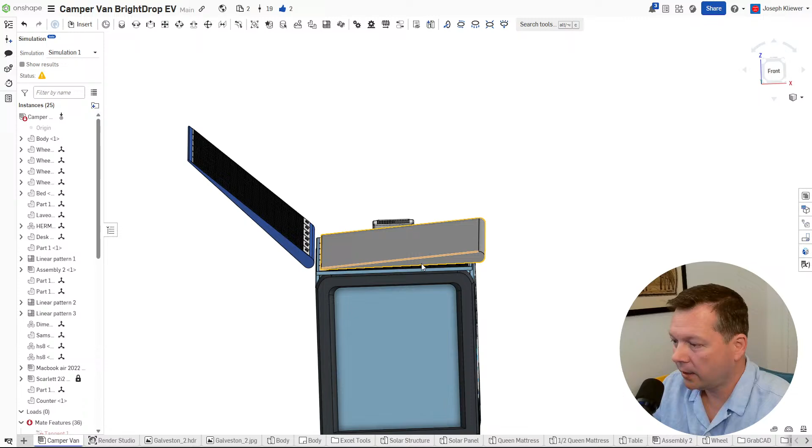And when you get to the site, push a button, you got an app, they open up. They automatically track to the sun, or maybe you just have a static setup, maybe you just got two shades on either side like that. So there'll have to be some pretty hefty actuators in there to support all that weight.

We can go into perspective view, we can fly in. This is what it'll kind of look like inside. And this is completely open to be reinterpreted however we want.

Initially, the thought is to have a queen-size bed that drops down, and then during the day it slides up. The monitor/TV could slide up, bed comes down, you can watch TV. More bed goes up, TV comes down, you've got a big monitor. You've got a seat here, which would turn into a couch with another cushion and double up as a bunk bed.

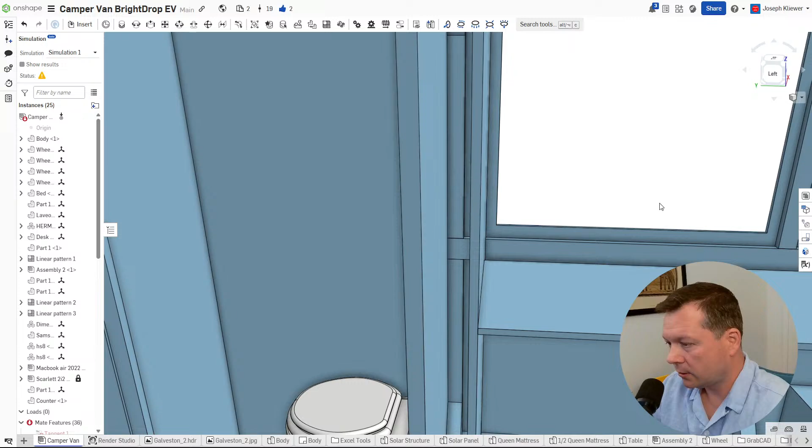And then you've got a toilet over here. Thought is maybe all the plumbing could kind of go in here between the walls. And this would be the kitchen area, so have some kind of fridge underneath, induction cooktop, everything you need up top.

Let's see. Oh, so the specs on this thing. Thought maybe we should kind of dive into what this Bright Drop EV van looks like, so I think we'll go.

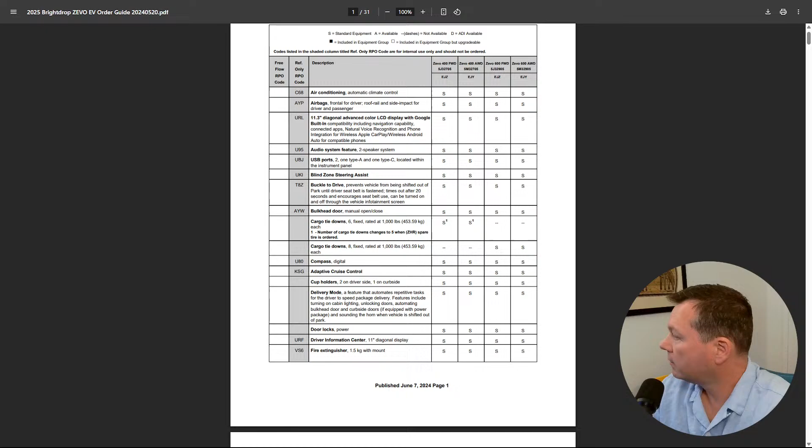Pull this off. Oh, I got it in the browser here too, I'll just use that one. Close that. So we start by adding some of the stuff into Excel here. Download Excel, and this is in the Onshape file. We'll launch that. Enable editing.

All right, so we can add a tab. BrightDrop specs. And get back to the model here.

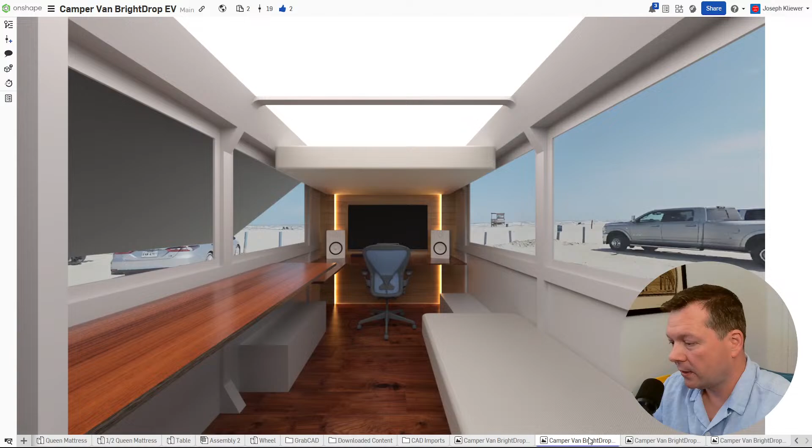And this is free to use software, so anyone can get in. It's all open. The only thing that's not is you can't do renders with the free version. I did render out a few that you can see, but you can't create them without the paid version. So actually this one, you can see the Cannonball Run car there in the background. I took a 360 photosphere when we were in Galveston, so that's kind of cool.

Which I think is a really good use case for this. You can park out on the beach, go out, do whatever you want, and then when you're done, you come inside, you've got AC, shade from all the elements, and the wind and everything.

So we're gonna put some of those specs in here. Oh, I forgot to mention, but this thing is on a crazy sale right now. I've got some of the incentives going on. So MSRP for maybe the max version with everything is I think 80 to 90,000, but they've got 25,000 off. Then they've got another 3,000 off for Costco exec member, another 2,500 consumer cash. Then if you're an LLC, you take another $7,500 off for the EV tax credit, and the thing's over 6,000 pounds, so if you have an LLC you could write the whole thing off on your taxes. So that could be pretty cool.

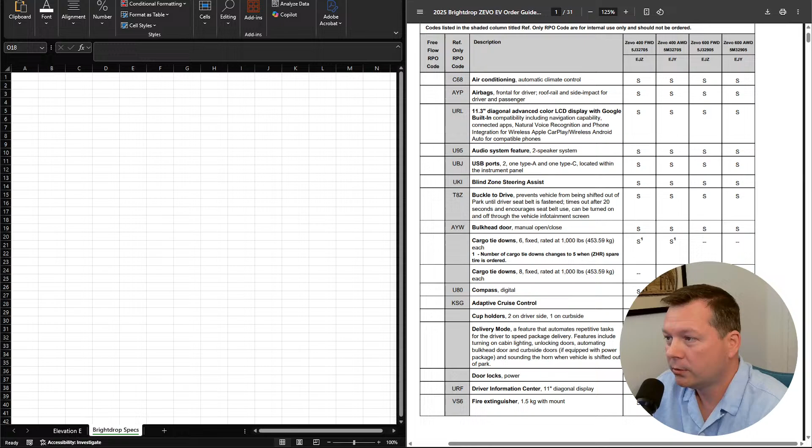The problem I see with the way you're folding the solar panels is that you can't charge while driving. True, the thought there is it's flexible, so you could fold it up. There's different options, like maybe you just delete these two, you just have them on the roof and you're charging all the time. But while you're driving, I tried to position them so they could come down flush along the side, like this.

Now I'm not sure what that does to aero. Looks a little goofy, but that way you could drive. I'm still kind of concerned about the shading you get from this kind of overhang. But in this scenario, the thought is you could drive and you get enough room where you can still get in and out of the door. So that should be an option too. And the actuator should be beefy enough, and maybe there's a latch at the bottom that you can latch them in.

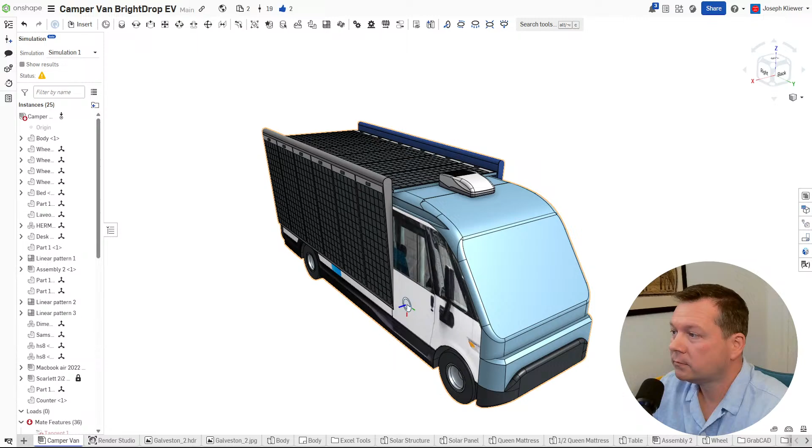So where were we? Oh, back to Excel. So these are all standard options, we'll fly through those. Standard.

But the interesting thing is some of the stuff you get in this document, which I think is kind of the ordering guide for dealers, gives you a little insight into the design and what this capabilities are. One of them's cool, Wi-Fi hotspot. That's kind of neat, so you wouldn't have to have a separate Wi-Fi hotspot, you could just use the OnStar hotspot.

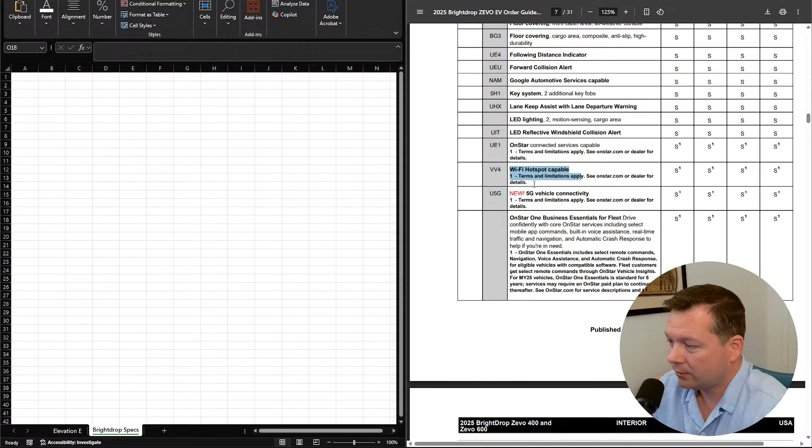Although in our old truck that had Wi-Fi, it had to be in accessory mode to work. So if the vehicle powers down, you might lose that, and that could be tricky because you don't want to leave the whole vehicle and the high voltage system on just to run a hotspot. That would drain a lot of energy. Let's see.

Flying through, you've got a ton of options here, mostly standard, like the tire inflation kit. We do have the wheels, so that's actually something we want to capture because I'm curious what the diameter of the tires are.

So we'll paste that in. And the wheels, we have two options here. They're all 17-inch, so I think that's just the style, black or white painted. But they are 17-inch, so that's kind of important.

Let's see, battery. So you've got two batteries. One that gets up to 166 mile range and one that's 272. I'm not sure if it mentions it here, but one is a 14-pack Ultium and one is a 20-pack, and the Hummer has a 24-pack.

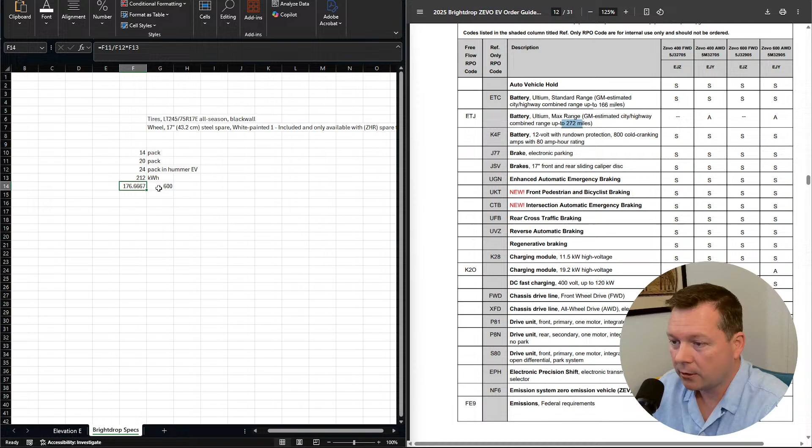In the Hummer EV, I think that's 212 kilowatt hours. So if we're looking at what this one's going to be, the 600 would be equal to the ratio of this divided by that, times the Hummer kilowatt hour. So we're looking at a 177 kilowatt hour battery pack, which is going to be important when we're charging it, just how large it is. For reference, the Tesla has, I think, a 75 or 80 kilowatt hour, I forget, so it's pretty much double what the Tesla is.

Charging - so this thing doesn't have a real fast charging. I think it's only 120 kilowatt DC, compared to other vehicles that can peak around 250.

Oh, this is the good stuff right here. So the drive axles, you get a few different options. You get front wheel drive or you get all wheel drive. The front wheel drive is new, but they mentioned the actual drive unit. So this is an X81F for the front drive only, and then the all-wheel drive is an X80F and an X77R.

And I used to work at GM, so I kind of know what these mean. I'm not totally certain on the 81F and the 80. I think the difference is one has a park system in it and one doesn't. So if you have a two-motor system, only one of them needs to have the park pawl, which engages and is for parking. If you have just the front-wheel drive one, I think that one's got park, and then maybe on this one it does not have park, but it's the same unit. And then the rear unit has the park system. But these are from the Hummer.

So for reference, these motors are 250 kilowatt capable, which is 330 horsepower. So in theory, the dual motor could go 660 horsepower, but they've limited it. So they're kind of derating it, which makes sense for a big, heavy vehicle. The duty cycle is a lot worse. They've also changed the final drive ratio, so you've got a lot more reduction up front.

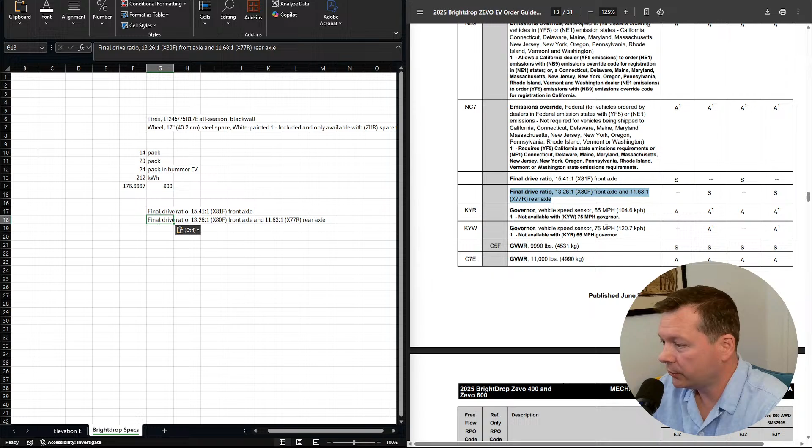And this is the full all-wheel drive. Another thing - in order to get that big battery pack, you have to get the all-wheel drive, which is good. If you're going to be out camping, getting around, you don't want just front-wheel drive, especially with a vehicle that's going to be at 10,000 pounds.

Oh, here we go, here is the rated horsepower. So front-wheel drive, 240 horsepower, 180 kilowatt. Now we know that motor is a 250, but they've derated it. And the all-wheel drive, interestingly, they're only rating it at 225. So they've significantly derated this motor, which is great for longevity - it's going to last a long time.

You know, people sometimes complain about how come you can make a semi-truck go a million miles and a car only goes 150,000. Well, they have these huge, massive diesel engines that are designed to last that long, and they're much heavier and much more expensive. So the other way to do it is you just take something that's rated at 250 and you derate it, and now your duty cycle is much less and the longevity will be much better.

So let's paste that in there too. Just grab it. I'll have to clean this up later.

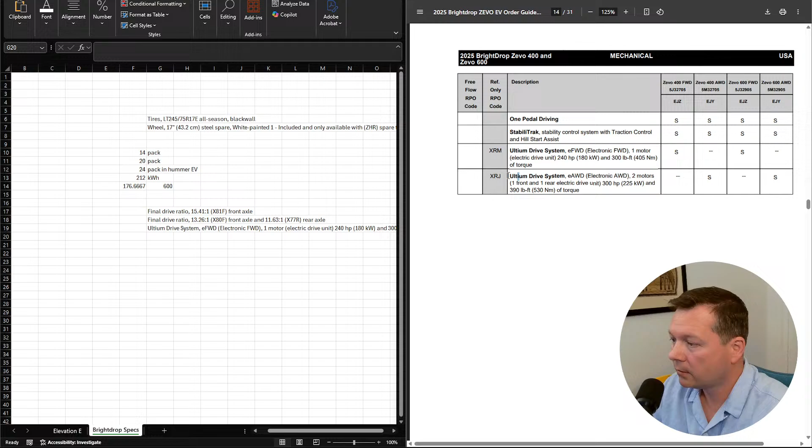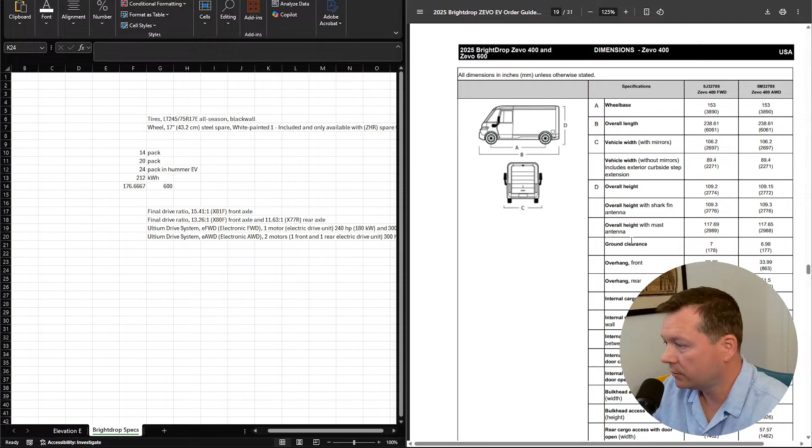All right, let's see what else we got. Yeah, different OnStar options. Oh, the dimensions - actually, we can check some of the dimensions. We'll come back to that, make sure I modeled the interior correctly.

Curb weight information - so each RPO or option is going to adjust and modify the curb weight. Here's your wheel options, here's the RPO - these are the options codes that they can put in there. That might be it.

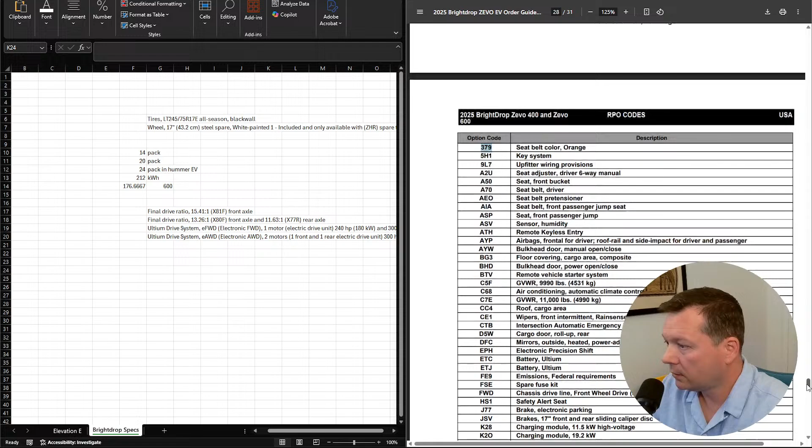All right, let's jump back into the model then. Let's get back to some of these dimensions here. So this is the 600, 600, 400. Okay, so we want the 600.

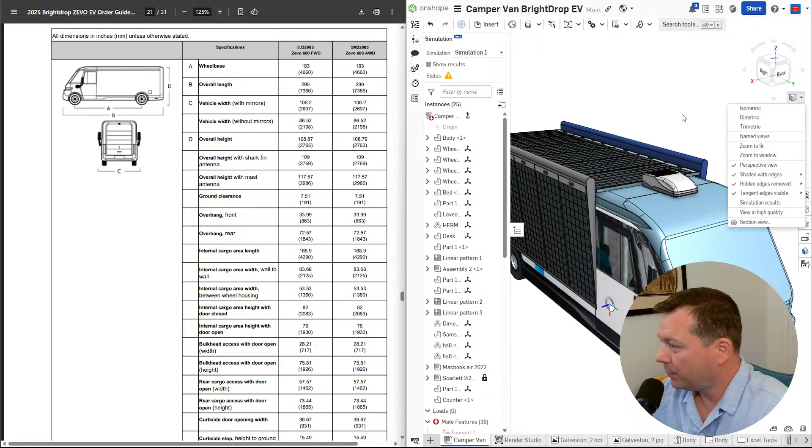Section view. I just started using Onshape, so I'm new to it and a bit rusty, bear with me. Where is the section view? Oh, right there at the bottom. Section plane, I'll just pick the top here and we'll chop the top of this thing off so we can look inside. Check that.

What I did was kind of cartoonishly model the exterior. Eventually the idea is to scan in a good exterior model and put that in there so it looks proper, and then all the internal stuff will be measured and dimensioned. The internals, where the supports are and everything, should be reasonably accurate. I got access to one and a tape measure and went to town measuring where everything was.

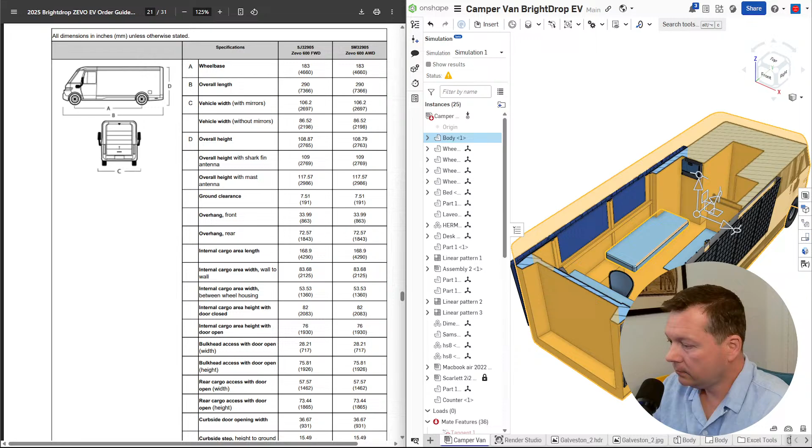Let's see, wheelbase. I think we just want to open this. Wait, give me a minute here.

Let's see, assuming you can figure out solar panel placement to generate power while driving, how are you going to get around the lockout, which likely exists for safety, that prevents charging while driving?

Good question. I don't think it'll charge the main battery while driving. There's a bunch of options we'll have to go through in terms of the solar setup. Ideally, you would direct DC charge and tie in directly to the batteries with an MPPT controller, and you could go right up to 400 volt. That would bypass some of the safety features and probably wouldn't be doable. The other option is you have a large auxiliary battery inside.

So if we go back here, I'm thinking this corner would be the power electronics side. You'd have your inverter, your charge controllers, and then some large batteries stacked in here. That would then have to charge through the AC charger on the vehicle, which is less than ideal, but if we have to do it, it's better than nothing.

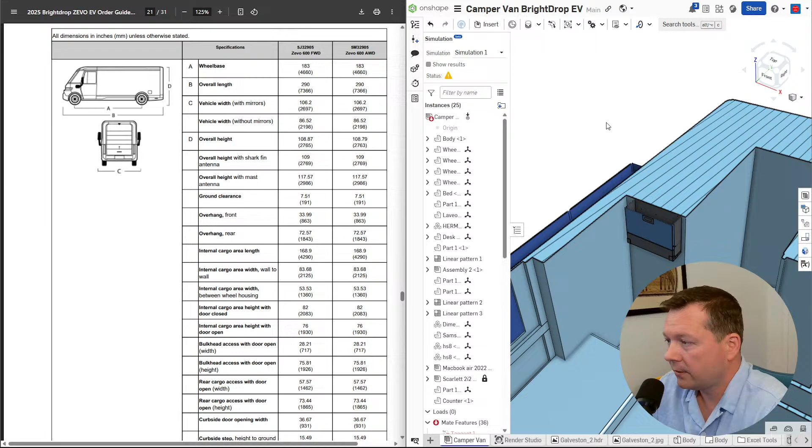So while you're driving, it would be charging this auxiliary battery. In my Tesla, I had a 5 kilowatt hour one. In this one, you'd probably want to double, triple, or maybe 5 times that, so you could get like a 25 kilowatt hour battery, which would be big enough to extract a full day's worth of sun into that battery. That would be the plan there.

Once you stop, you could plug that charger in and dump it in real quick at like a level 2 rate charging, maybe 11 kilowatts. So that would be how you'd extract solar energy while driving, but you couldn't direct charge while driving, unless you tied into the system, which I don't think GM would let you do. You could always hack into it, but I wouldn't want to do that, you want to keep the warranty.

Okay, so back to the body, and we'll section it again. We'll just drag off the top here. So wheelbase, let's see, that should kind of match this sketch here. It's been so long since I did this.

So, 4,826... 190 inches. Oh, that's another thing, I've got Onshape set to metric, but you can type in anything you want and just type in the units and it'll take care of it in the background, so you don't have to worry about it. So wheelbase 183, huh? I thought I pulled that off of documentation, but that does not match, so we've got to change that.

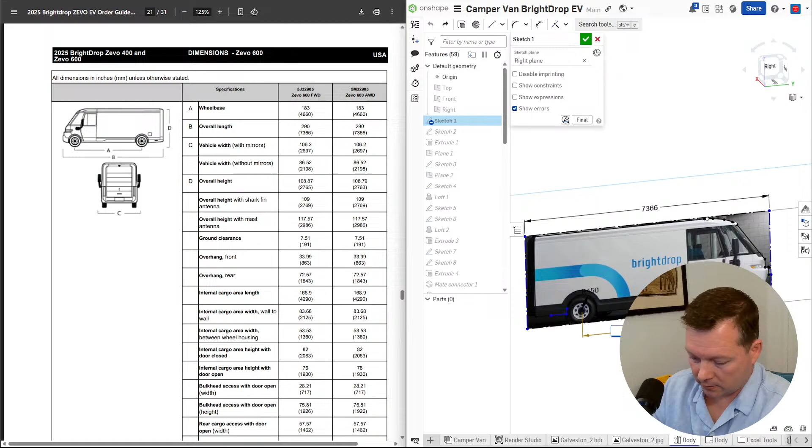183, now I'm wondering where I got 190. I don't know, if I change it right now it might break something. Let's just see what happens. Oh yeah, oh. Control Z, gotta type inches. 183 inches, okay, I shrunk that in.

That might explain it, because I was having issues with these wheel hubs. Now it cuts into the wheel hub, so that doesn't line up. I don't know, I will undo that. We'll have to look into that later. So that's off, that's one thing.

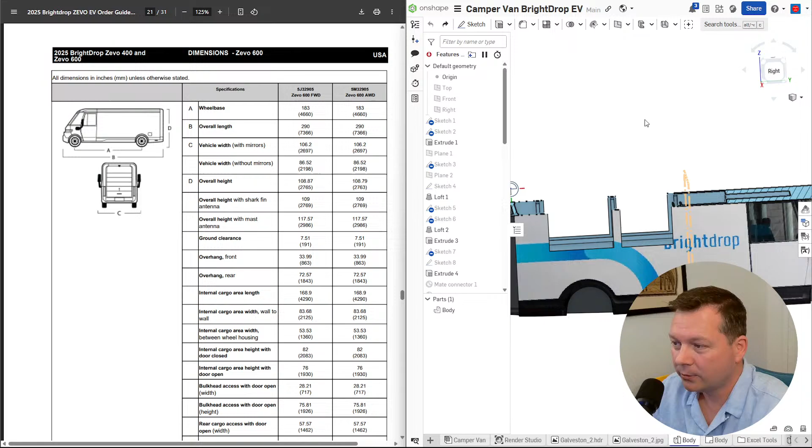Overall length, 290. Let's just show this sketch. That's not the right one. Sketch 3, hide that, 4, 5. Where's all that information in? I guess it's all here. There, I need to kind of hide that body so we can see the sketch better.

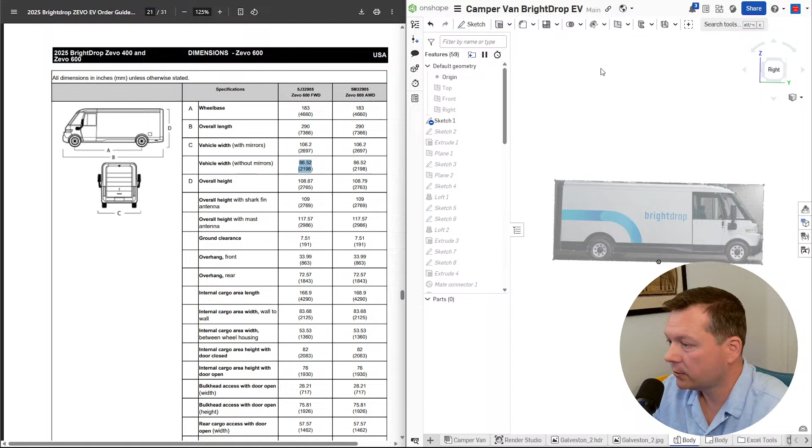Or we'll just go edit. So overall length, what did I put? 290, okay, so overall length matches. Vehicle width without mirrors, I don't think I had that number when I first did this, so that'll be interesting. Let's take a look at that sketch.

So this is a picture I found, and then I just pasted it in there to kind of get an outline.

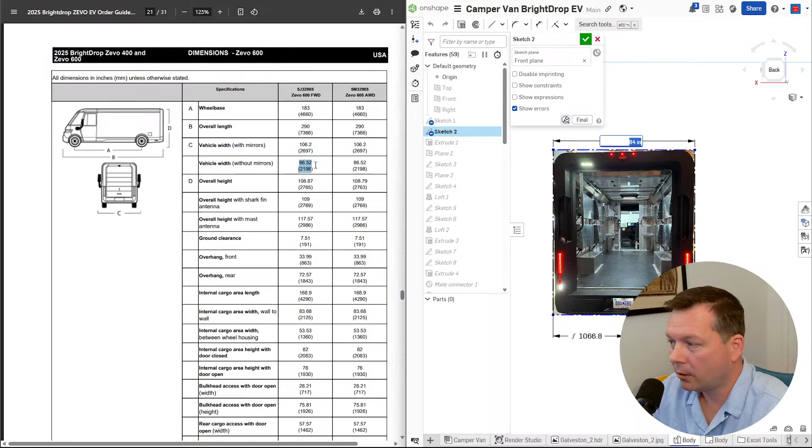84. No, okay, cool. We've got an extra bit of width there. So that's good. It's good to be wrong on the small side. We can fix that later.

Overall height, now let's check that. Edit. I don't have overall height in this one. Oh, you know what I did? I didn't have those numbers, so, well, that's overall height, and this is height of the box.

But what I did is I used one dimension to scale everything. So I used the picture as a reference to the height to width ratio, and then I locked that in with a number I got somewhere, which doesn't match, so I can update these. Turn that off.

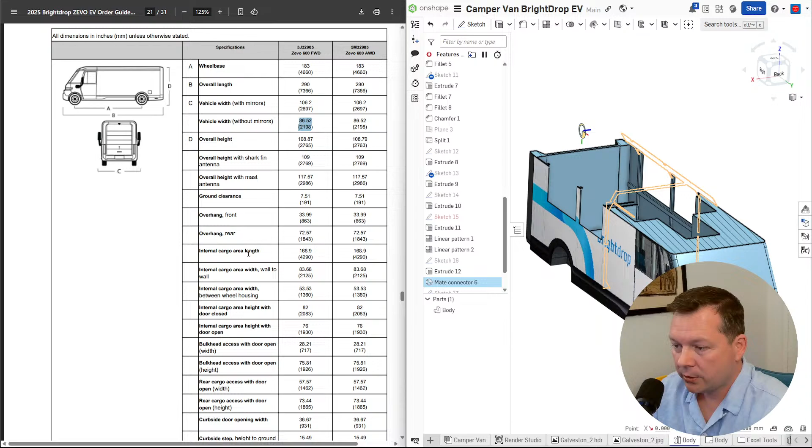Ground clearance, okay, that'll help with the underbody. Overhang, internal cargo area length, 168.9. Let's see.

Extrude, there's the sketch, so let's edit that sketch and let's see. Internal length here, 163. Oh, I got it short. We got some extra room. Nice, so it's a little bit longer than I anticipated, which is going to be good.

Internal cargo area width, wall to wall, 83.68. Okay.

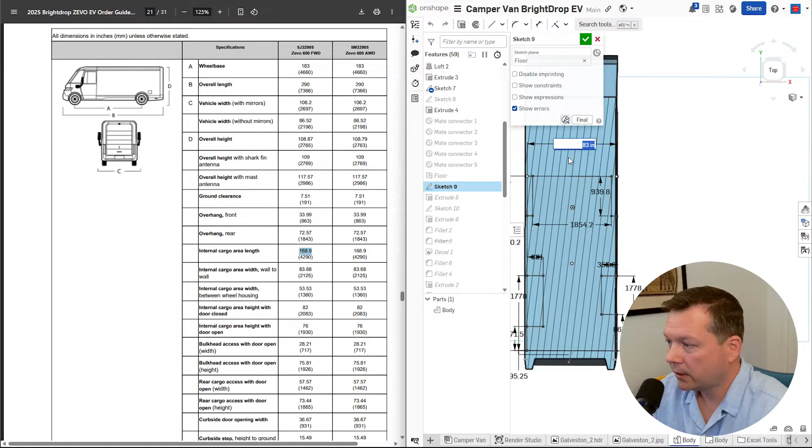All right, so we got some extra length there. Door height, bulkhead, not too concerned with that, but it's good that we've got extra room because it started getting a little tight on me.

We've got this siding here, which is pretty thin, not structural at all, and it has these aluminum supports, which are welded and kind of give the whole frame structure. So the thought was cut out largest windows possible in between those supports, and then these are what we can fix things to.

And then you've got the wheel well constraints. This one is a little longer because this extra part back here is where the charging port is. So all the charging is there, and if we can tie into that and direct charge, that would be the location.

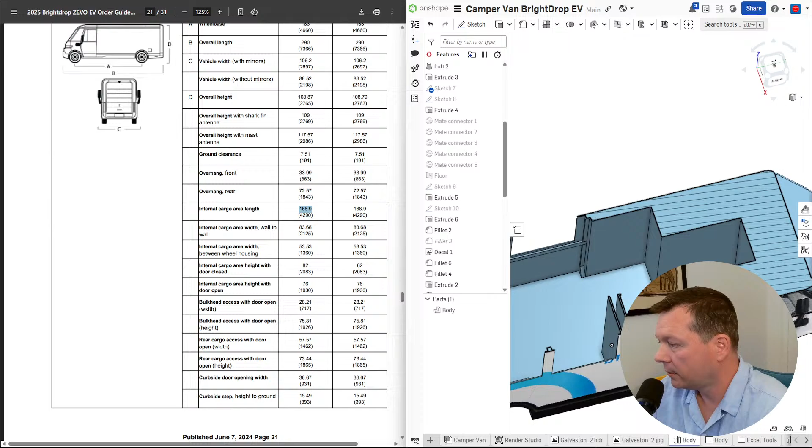And I don't have the cockpit area modeled yet. You can kind of see this is just a picture that I threw on top of the model to gauge where everything's at. So in here you've got the driver's seat, passenger seat. So quick layout here, we'll go back to the assembly.

This is the kitchen area, and it gets kind of thin. So this thickness here is about shoulder width, so you can comfortably walk through. So I don't want anything really protruding out into that area too much.

It makes the bathroom/shower a little tight, but the thought there is to have a tray, a water collection tray. Maybe it slides out, or maybe it's okay being that width, but then a curtain that extends out and gives more shape. Kind of like when you're at a hotel and they got that narrow bathtub and then they got that curved curtain that gives you a lot more room inside the shower.

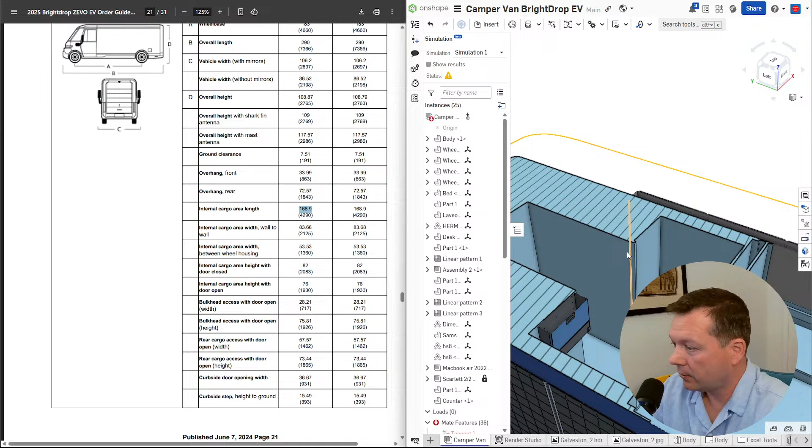Same thought here is to have something that extends out and brings a curtain out to give extra space, so you're not too cramped, and then when you're not using it, you don't have this large enclosed area that's impinging on the occupant space.

Oh, another nice feature about the panels folding down is it's kind of like a privacy mode. You can black it out, and I'd say stealth camping, but I think people are going to figure out that it's a camper van when it's got that much solar on it. It's got an air conditioning unit on top and all that stuff.

Which is another thing, Aero. So I'm not sure if we have anyone on that was looking at the Aero, but I think someone has access to some CFD software so they could do some Aero. And I think we can get the drag coefficients, the coast down coefficients.

They're published for passenger cars. I'm not sure if they'd be published for this. I'll have to take a look and see.

But if we can get those and then correlate it with a CFD model, so we take the base vehicle and we have the known drag coefficients, and then we correlate it with a model, get the same drag coefficients, then we can make all these changes and rerun the simulation and see what our new drag coefficient would be.

And then build a full vehicle model in Excel of power, battery capacity, all that, put in the drag coefficients, and we could plot out your new range at different speeds. So we could figure out exactly what our new highway and city miles rating is going to be.

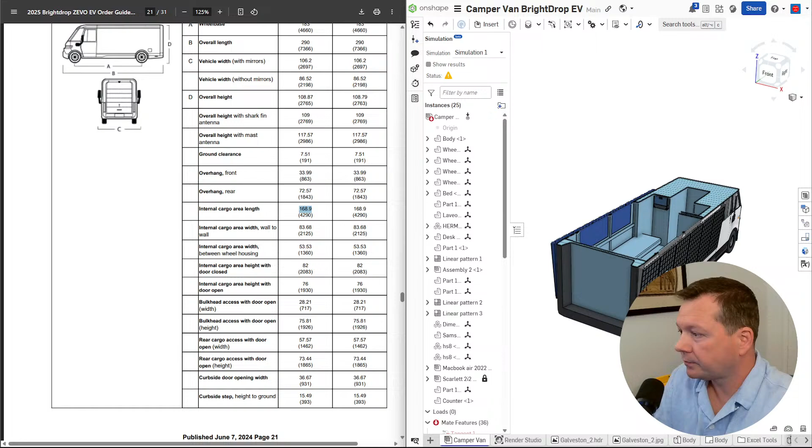Let's see what else. Let me chop that back off. We'll just turn that off. And fold these back up. Let me go full screen on this. I think we're done with that.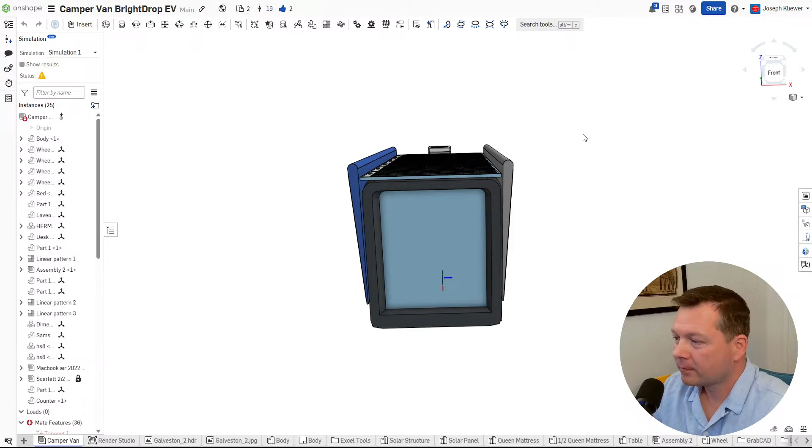Fold this back in here. Let's see, then we'll section it back, put the section view back on. Get those out of the way. And then I want to add another plane. We can chop the front off so we can see inside. Like that.

Ah, on my phone, okay. Nice, yeah, I'm not sure how this would look on a phone. This is my first live, so you have to bear with me here.

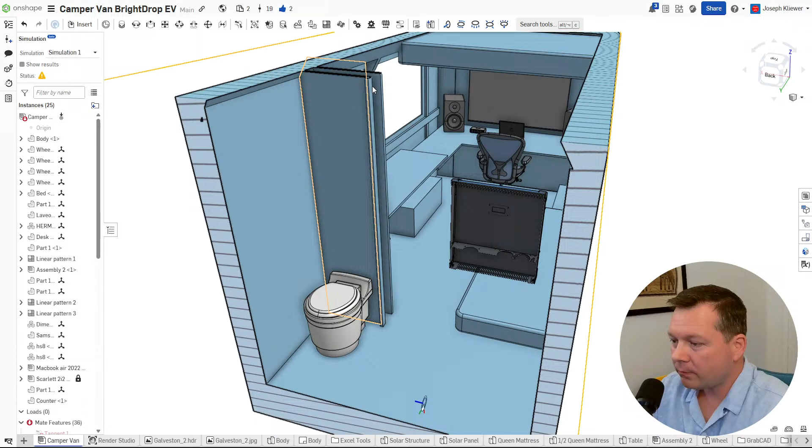And this is all just cartooned in. But here's the issue I've got. The roof, actually let me turn that, put the top back on so you can kind of see. The roof here has this angle, so I don't know if a full-length queen-size bed really fits, although we just found we actually have a little more width to work with than what I've got in here. But if it can only go up so high, then it doesn't give you a whole lot of room.

Also, the sliding door comes up into here. I think ideally you'd want to get rid of that sliding door, the garage door style, and have doors that open up out the back. And then you could get rid of the rails and all the internals here. In fact,

Let me pull up some pictures of this.

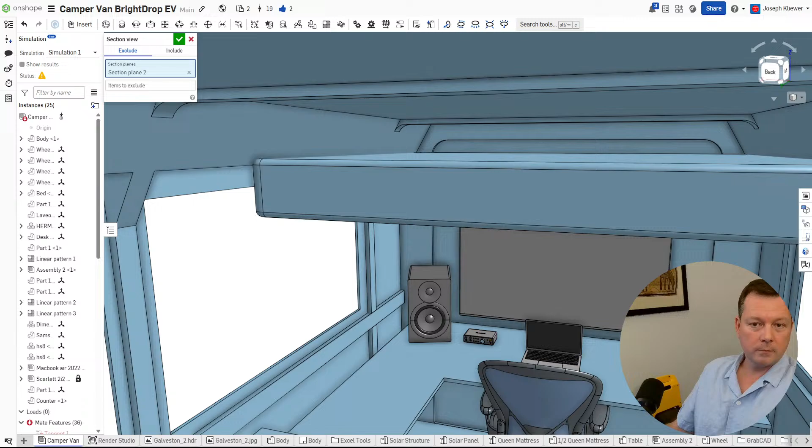The other problem is, let's say it's snowy and nasty outside, and you've got dirt, grime, wet on this garage door, and then you open it up, it's all going to drip into the inside of the van. So you have to enclose it all off and put some kind of drainage that contains it and seals it to the outside, not to the inside. That would be another reason to get rid of this door and these rails.

I don't know if I have any other good pictures. Most of them are just real close-up shots of taking measurements of everything that I tried to model in as accurate as possible.

We can get rid of that. So that's what we're working with here. And I don't know, maybe the bed rotates the other way, so instead of sleeping sideways, you'll sleep in line with the vehicle.

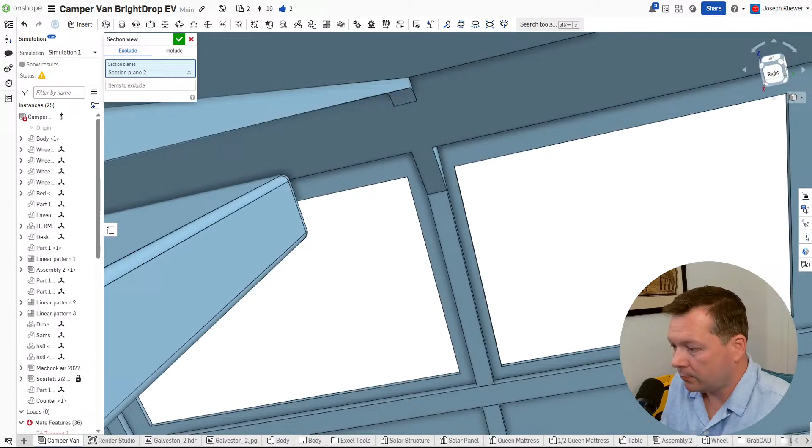But that presents a problem with the couch slash bunk bed setup here. If you get behind, actually it's floating in two planes here. Let me lock that down. Oh, I'm still in section. Accept that. We'll pick this surface. And gosh, how do I get in and pick the bottom? Pick that surface. And where is the mate?

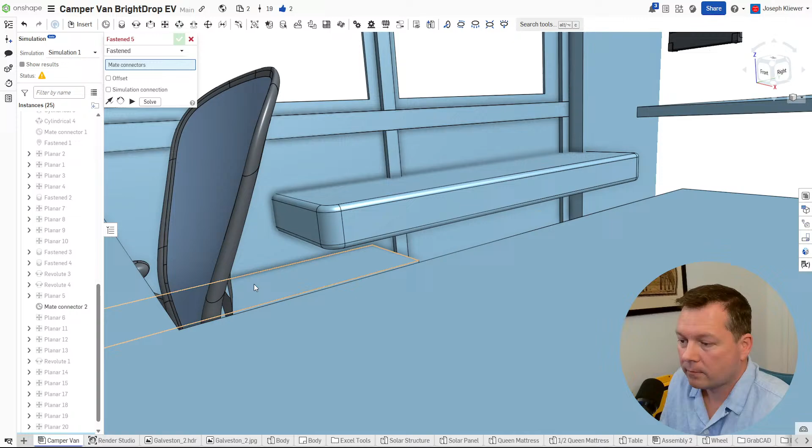Parallel mate, fastened mate. Okay, hopefully that'll still let it slide around. Let's see, no, I totally locked it. Okay, undo. Undo.

Actuator attachment for the solar panel wings will be tricky to get the motion you show if you have one fixed anchor point and one movable point. If you have one fixed anchor point and one movable, move the second end of the actuator, second point, and continue. Not sure exactly.

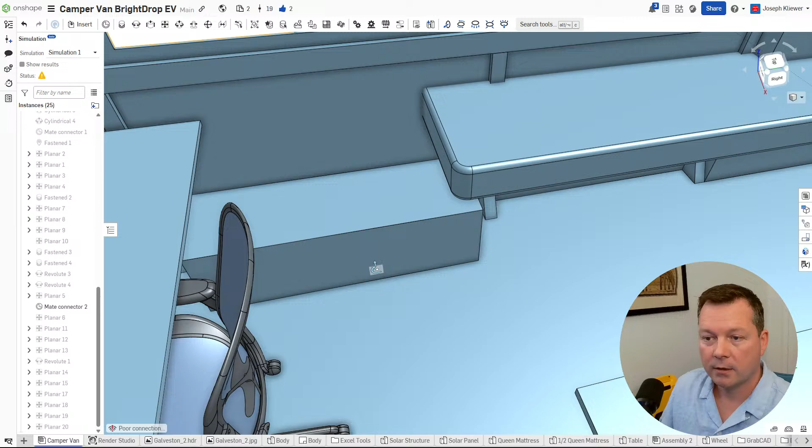I'm thinking of having a kind of like a torque tube. So this will be fabricated similar to an airplane wing, so it'll be sheet aluminum with struts inside. It'll be kind of like an airframe, and then there would be a torque tube that it's fixed to, a rigid long tube of aluminum. It would have a bearing support in one end and a bearing support in the other end, and then inside of that would be an actuator, a motor with a pretty large gear reduction to drive it. I think it needs to be around 1,000 to 1.

And I haven't looked yet, but some good points to reference might be actuators that do the blade pitch on wind turbines. Those have to be pretty powerful. Another one is Fanuc robot arms. They have built-in actuators that might have the right reduction in power, so maybe you could find something like that we could fit inside of there. I don't know if that answers the question.

Back to this thing. If you get a top-down view here, zoom in. Let me just chop the top of this off again. Edit section, add a section plane, which is any flat surface on the top.

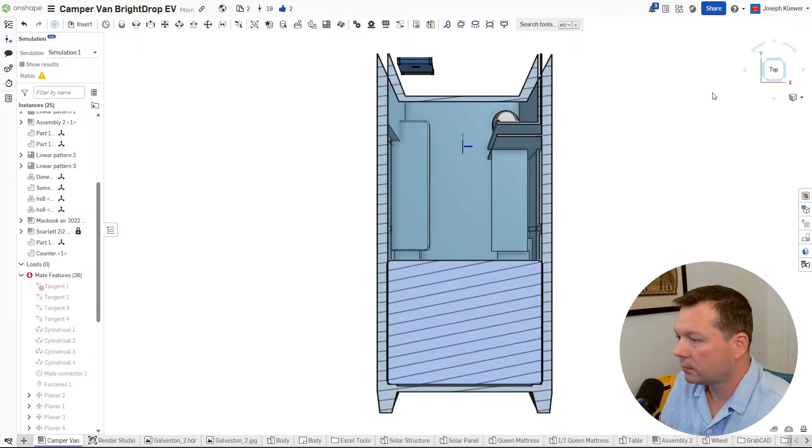So we put it back here to where it clears. This is a little cutout for the door, the sliding door that goes inside. If we do that, these two beds collide and you get some headroom issue. If we put it out in front like this, then it starts encroaching into the walkway.

Let me turn that first section plane off. Now you can see, let's pretend like you had it all the way up here - that's really tight. And here, it just makes this whole thing really tight. So ideally I'd like to bring it back over here. We can do that.

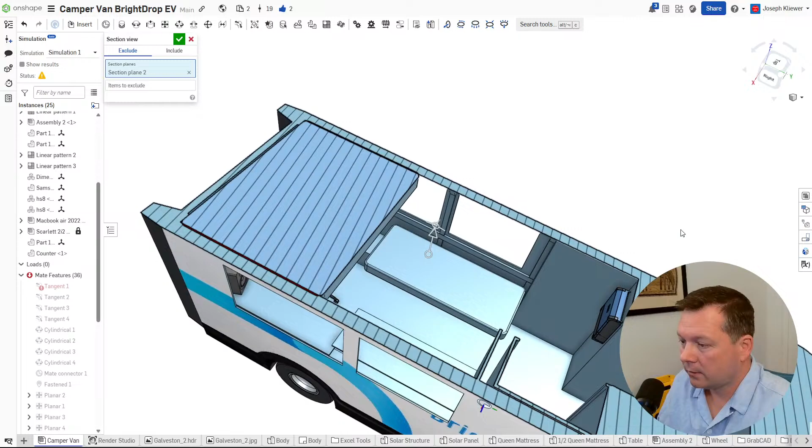You can see in this view, if you had two of these and one was a bunk bed - chop this wall off there and snap to this. We'll turn off perspective so you can see it better. Now you can see, if this comes down and you're sleeping here, and someone else is trying to sleep here, their head's going to be right into that bed. And if there's one up here, it would collide. So I'm not sure the best way to do this.

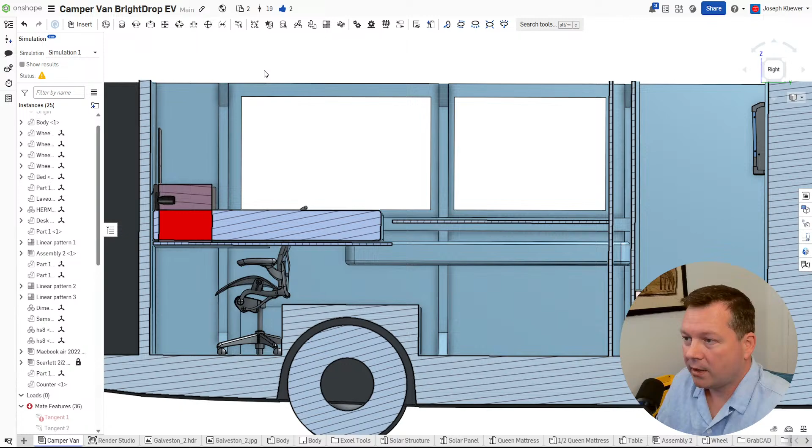But anyone can pull this model. You go to the link, pull it up, create a copy, and then move stuff around and make edits. The idea is someone that wants to contribute and actually design on the master version - we could give out permissions and get 5 or 6 people actually designing in the same model.

Why not just a non-square shaped mattress? Yeah, we could buy the mattress and then just cut out whatever we need. That's a good idea, let's do that real quick.

Let's open this part and go into the sketch, because your feet don't need all that extra room. We'll draw a cutout here and trim off that. Oh, I got rid of my dimensions - I didn't want to do that.

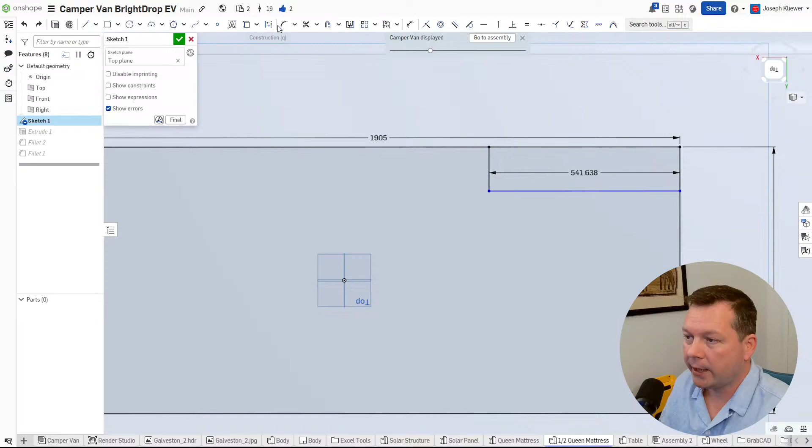How do I trim and still keep that dimension? I can always re-add it. Yeah, maybe not, I'll just add the dimensions back. And then I don't know what to make that yet, but we'll just try it like that and see what happens. Okay, let me get rid of those fillets.

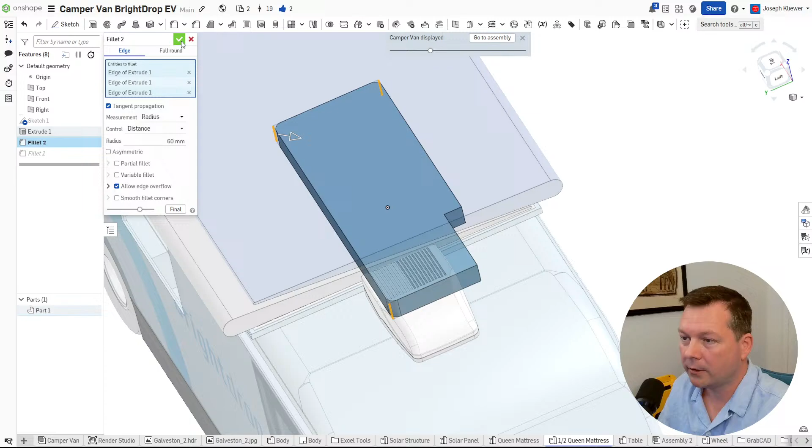Where are you? There. Okay, well the filleting still looks kind of weird, but we'll see how that looks. Yeah, there we go - you could put your head here and your feet down there, and you lose a little bit of space, but as long as you have enough shoulder room, I think that's perfect.

And then the trick is, how do we turn it into a couch? The thought was to have the same cushion be a couch behind it that also turns into a bunk bed. So let's see what we could do there.

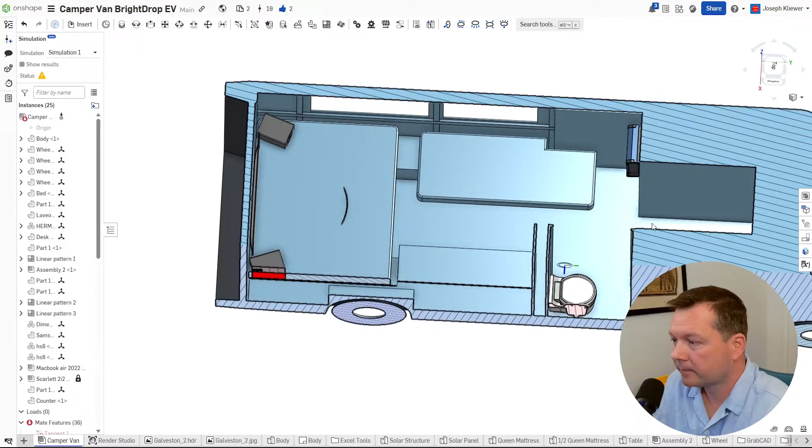Let's make sure this is positioned right. Okay, it's already locked in at the edge, so that's where that's going to sit. So now we've got plenty of space - in fact, we could even bring it back a little bit more. Let's change that sketch a little bit. 400.

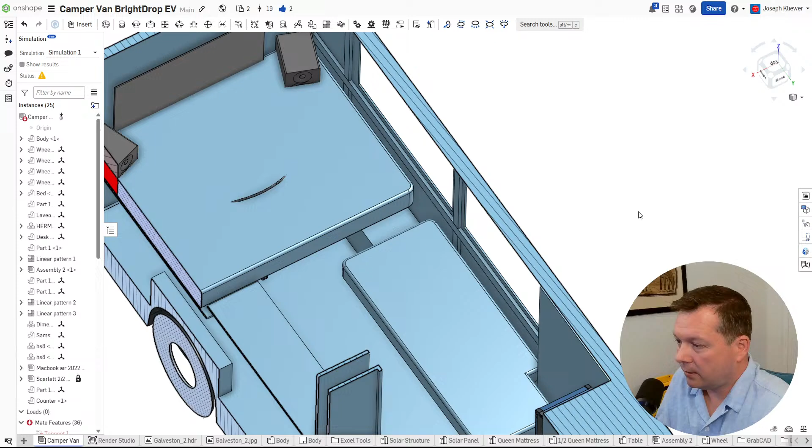Oh, we need to add insulation and a wall. I've heard wool is really good for sound, moisture, and thermal, and it's also quieter. If you use that blue board stuff, I hear it's really noisy - the whole thing just squeaks and rattles. So I'm thinking a layer of wool insulation and then some kind of paneling with slots or a grid that exposes the wool so it's not real echoey. If you just have solid wood everywhere, it could be real echoey and loud with people in there, but if you have slots it'll act as sound dampening too. So it'll insulate and dampen the sound, keeping the cab nice and quiet. So we've got to move this out a little bit.

And the same goes for this cutout too, so we'll have something covering that and insulating it. Maybe you don't need as much insulation over on this wall because you've got a double wall to the outside anyway.

But that we'll need some space there. How much, I don't know yet. Let's see how that looks if we look vertical. I need to get a mannequin model in here showing a person size so you can see where your shoulders are, making sure there's plenty of room.

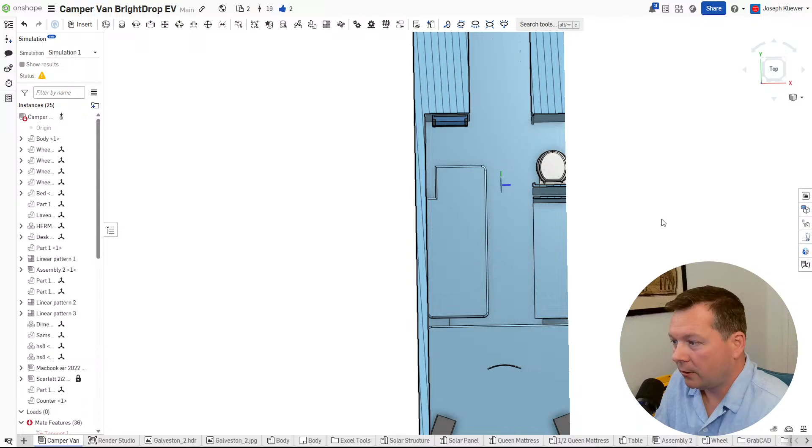Although these are significantly bigger than a Sprinter van, which is really nice. Sprinter van's the most popular for conversion, but this is much wider and longer, and the height, I think, is even taller inside.

So let's see if we could drop another one of these in and somehow turn this into a couch. I forget how you do that in here.

Let's see. I think you just import. Oh, here we go, insert. Oh, and the dimensions on this. I dimensioned it as a queen mattress split in half. So it should be plenty of room for a regular sized person.

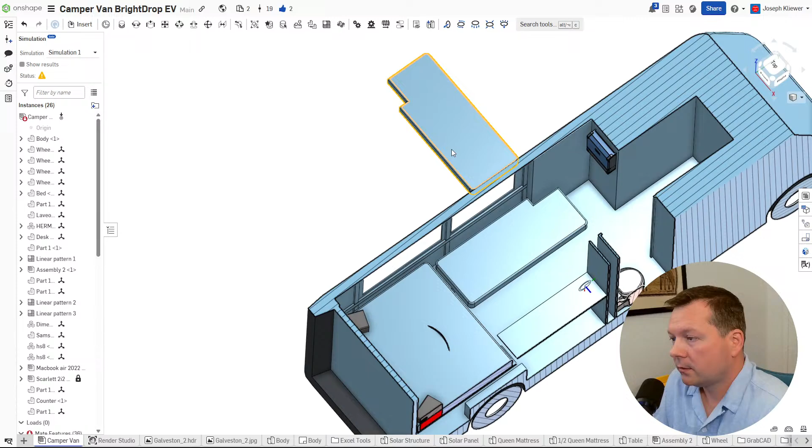Now, how do we turn it into a couch and keep the length and still have this issue here? Let's make a parallel mate here.

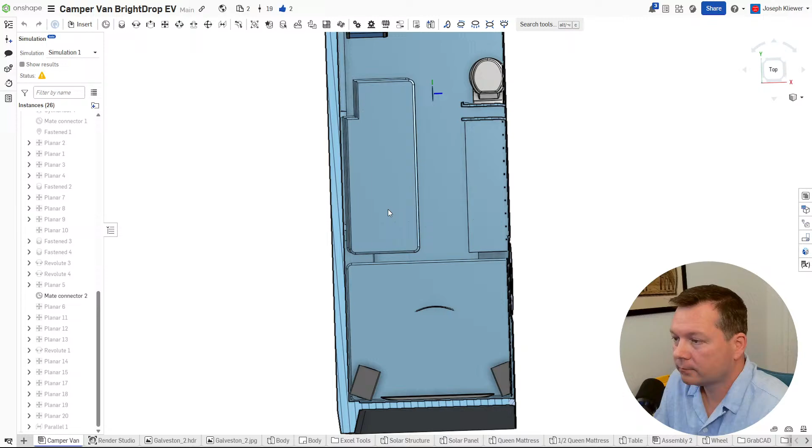Let's see, okay, so it lets us move it still. Get it on top. Maybe this is a little lower too.

So there, now you got a bunk bed. So this would be sleep mode. You got enough room where everyone can access the bathroom, take a shower, everyone's sleeping, kids can sleep in. Maybe there's even a curtain here that comes and divides off mom and dad from the kids. That would be nice.

Oh, have you explained why you're doing this other than an EV? Cool, solar cool, breaking records. Yeah, so that's a good point.

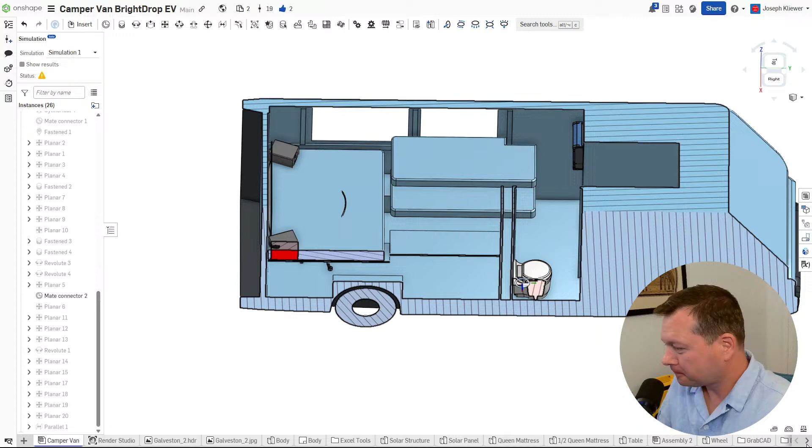I used to live in Houston, and I used to love going to Galveston, and I used to kite surf. And at the end of the day, you're tired and you want to chill out. The last thing you want to do is pack up everything in your car and drive for an hour back to your house. I thought, how cool would it be to have everything you need right there at the beach where you're done for the day. You just walk into your air-conditioned RV and you chill out, sleep for the night.

And there's areas there where it's just open use on the beach. You could camp, do campfires, whatever you want. So you can just chill out in your RV. But I think the applications are bigger than that.

I used to do landscaping and I had a work truck. And I think the idea of a work truck nowadays, the beds are so small and you don't have lockable storage. These BrightDrop vans are the perfect work truck because you can get everything in storage. It's all lockable. You don't need to tow a trailer.

So typically, landscaping crews have a truck which has hardly any room in the bed, so it has to tow this giant trailer. And then you've got everything loaded in the trailer that you can lock up at night. But with this, you've got everything in one unit. You just get in, you start it, and you go.

And with solar, you could do really remote locations. So it could be an emergency response vehicle. It could be a mobile medical unit, something where you need power. It could be a mobile machine shop. It could be mobile auto repair, construction.

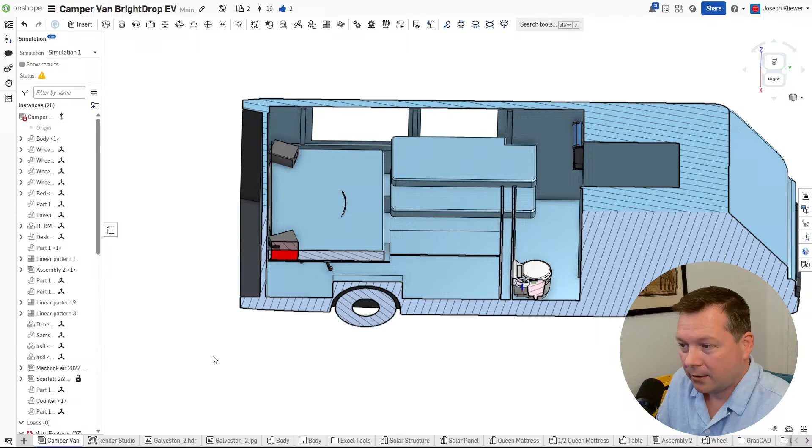And it could be used for a solar cannonball run, although I don't know, it would be pretty slow. Just looking at that battery capacity, the solar is the same size array I had when I did the cannonball run - that was 6.4, this is 6. But because of the added size and energy required, it would be even slower. Although it's solar tracking and up off the ground, so you get rid of a lot of the issues I had with shade on the panels, ground features obstructing the panels, leaves, uneven terrain. Yeah, I put out the array and I've got a little bump, so that panel's high and then it shades the panel behind it - those kind of issues.

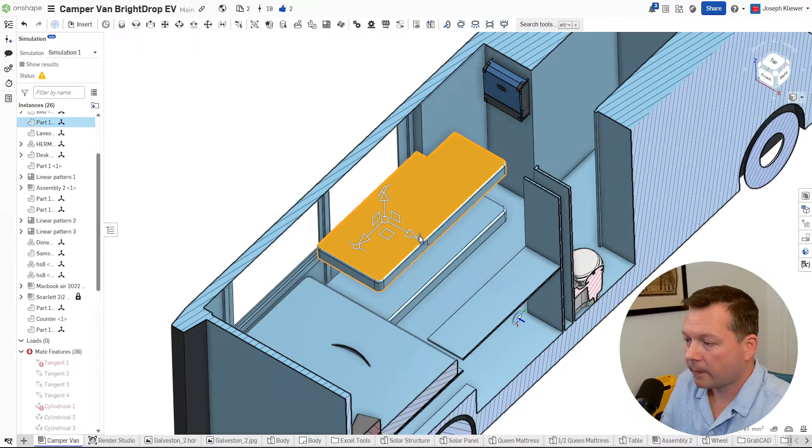So now how to turn this into a couch. Maybe it just kind of folds down. Let's see, I need to turn off that constraint. Parallel, so let me delete that out. And if I rotate it like this... let me do another section here. I'll chop the back off so we can see inside. Bring it like this, bring it down. Maybe something like that. And then it's still got that strange cutout, but then you've got a couch. And maybe it's just got a hinge pivot and just swings up and locks in place, and then it's a bunk bed. I don't know, but I like it.

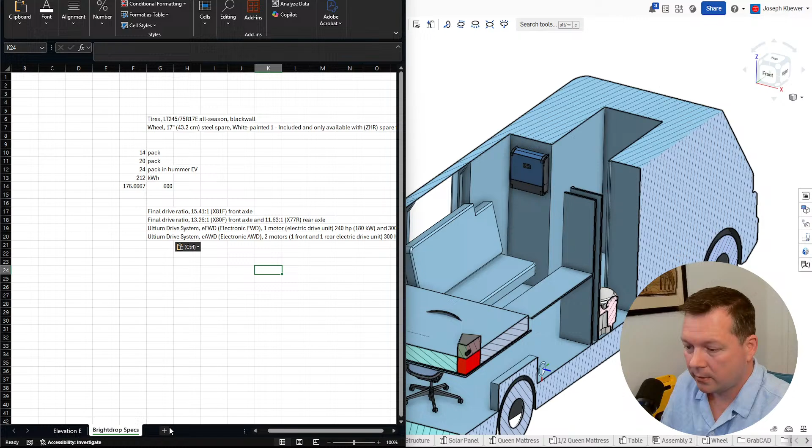Now for the power electronics, I think what'll be good there - maybe I'll start a new tab. We'll do electrical, and there's a few different options. Option 1: so ideally, I'd say this is ideal, this is the best if it works. This is, you have DC, you have solar, so photovoltaic DC to the vehicle EV DC charging. So this is charge electronics and power.

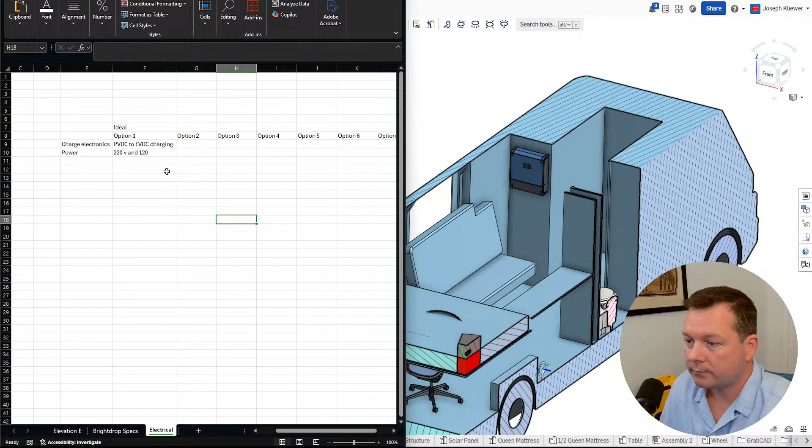So this thing is built, a lot of it's built off the Hummer platform, and they have, in the Hummer and the Silverado, 220 volt and 120 volt module that they can use. So ideally, if you get that, all you have to do is charge the main battery in the van, and then it has the power export. So there's no need to have any extra batteries, electronics, nothing. All you need is a solar DC to DC charger, which there's a company out there that was working on it.

And power, I think... no, what was it? Intelligent, that was the name. Intelligent, I probably spelled it wrong. Never mind my spelling here. Here we go. So this company was doing a DC to DC EV charger, and they pivoted away from it, and now it's a battery backup DC to DC. So they're still doing DC charging from solar, but they've got a battery bank that goes with it.

And maybe that's the solution too - maybe we drop that battery bank into the back of the smaller version, and then you can do DC DC, and you've got an extra auxiliary battery. The problem is it looks like it's pretty big, like 20 kilowatt hour DC or 25 kilowatt DC to DC charging. Our solar array is going to be 6, so this is overkill. So the battery is going to be bigger than we need, the charge controller is going to be bigger than we need. But that represents kind of the ideal solution, I think. And then that's all you need.

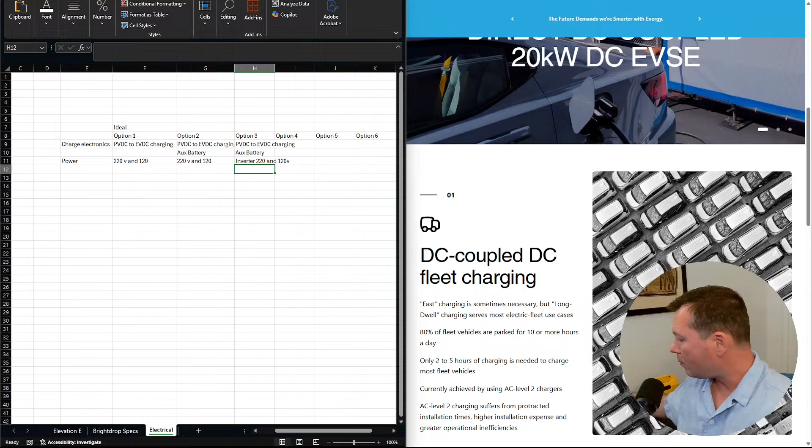Oh, I've got to take a drink there.

So, aux battery, inverter. Let me distinguish this - this is a built-in inverter, GM built-in.

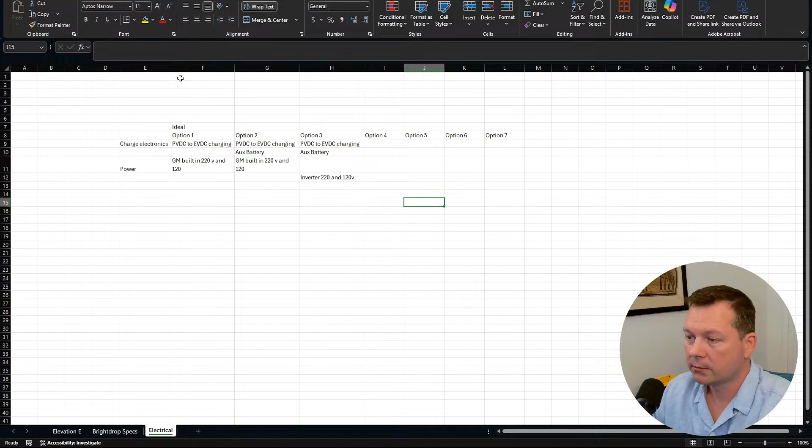And let me just make all this wrap text. There we go. So this would be less ideal - you still need an inverter. And then this would be, let's say, we use completely off-the-shelf stuff. This is basically what I did for the Cannonball run.

So we need an MPPT charge controller, you need an aux battery, you need an inverter. Is that everything you need?

You'll have your - and this, for instance, is an MPPT charge controller from Victron. And I think it's got 2 trackers. Ideally we have 3 panels, we'd want 3 solar trackers. Essentially, one tracker can only do as good as the panel that's doing the best. So it'll bypass the lower panel, but you don't get to take full advantage.

Of 2 different arrays. Now the 2 tracking arrays typically would be the same, except for the use case where they're folded down around the van. Then you'd have 3 distinct panels at different angles, and you'd want 3 trackers. So maybe this wouldn't be the best. But anyhow, this would take the solar input and direct charge a DC battery, and then you'd have maybe an inverter underneath of it, and that could plug in and charge the van.

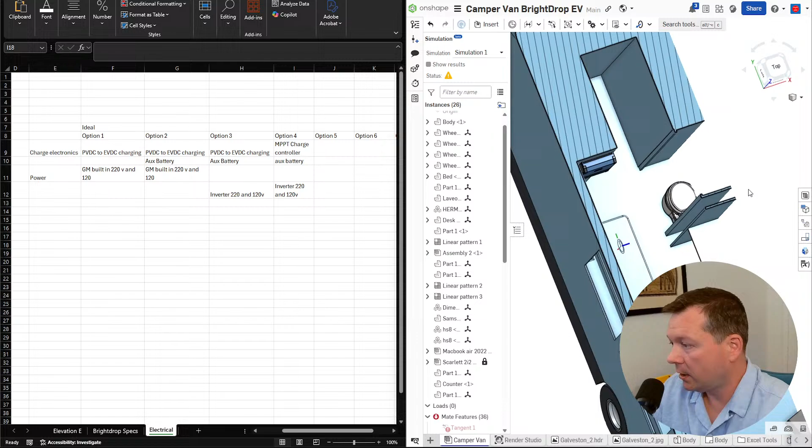Another thought was weight, to kind of keep it symmetric. Have the heavy batteries here, and then have all the water and tanks somewhere over here. That way you've got similar weight each side, as well as plumbing. So if we keep all the plumbing right in this area, so you have a sink here, you have a shower here - everything's right here. You don't need to plumb stuff underneath the floor.

And I want to do as little modification to the BrightDrop van as possible. So if everything can be built kind of like a cartridge design, where you can put it into the van - you build it offline. You're not acquiring the van and then doing a ton of modifications in order to make this retrofit work. Keep it as stock as possible.

And it'd probably be cool to have one of those recirculating showers, where it has a filter, a UV thing that kills anything in the water, and it just recirculates, so you can have an endless hot shower, which would be pretty cool.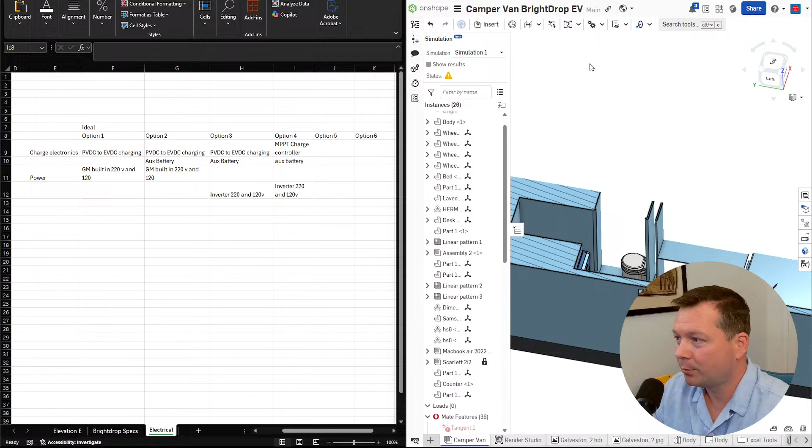Let's see, the most difficult points I see is stable mounting of the solar panels, and enabling DC to DC charging through the charge port, especially because of the protocols and safety systems. Yes, that is the problem. And I think that's why Intelligent pivoted away.

The protocols in the vehicle - they've got these large contactors that ka-chunk, click, and open and close that circuit. And it's not designed for the intermittent solar power, where a cloud comes over and can drop to 0 in just a few seconds, or a fraction of a second, and then it can come back up in a fraction of a second. So you would need some way to tell the vehicle, I'm charging you, stay on, even if you don't see power. And maybe that's difficult to do, which is why they've pivoted to this battery backup. Maybe it's not because of market demand, maybe it's just the requirements of the vehicle.

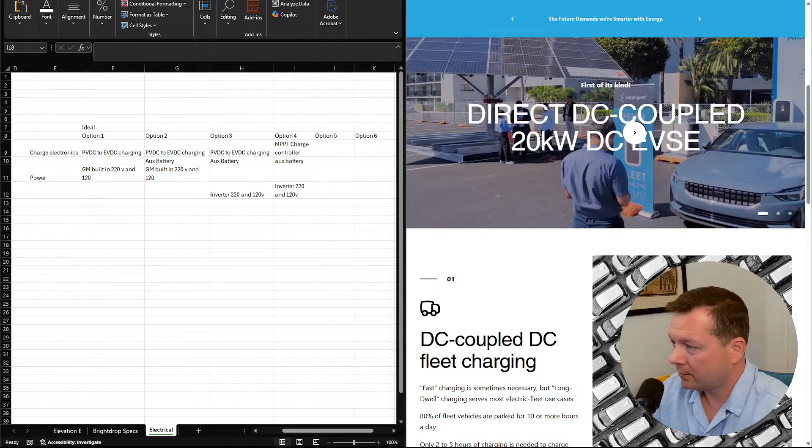And I'm sure they might be all a little different. Everyone's standardizing on the North American standard, which is the Tesla port. And I don't know enough about the electronics side to know how that would work, but that's definitely an issue. Now, if you AC charge and you have a backup battery, then there's no issue, because you can always supply a continuous voltage to the car.

Oh, and then stable mounting of the solar panels. Yeah, let me pull up what these solar panels are. I think I have a spec sheet handy. So Maxeon, which used to be SunPower - they split off.

SunPower went out of business. Maxeon is hanging on by a thread. But I'm really hoping they can pull this off and stay in business, because they've got some of the best cells out there. They are looking at making these Maxeon Air panels.

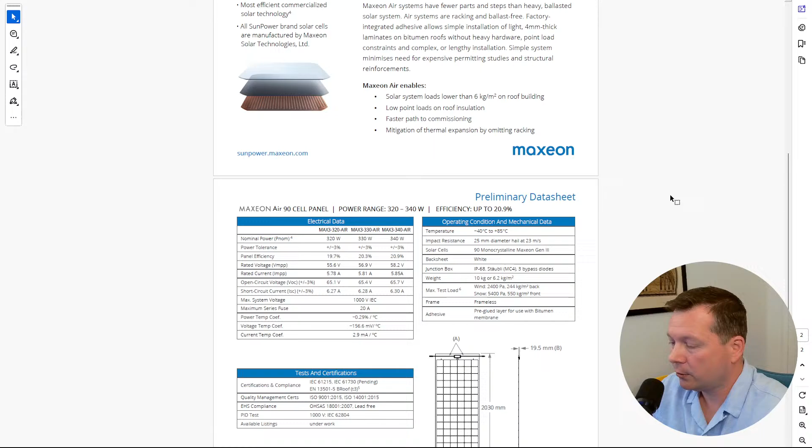It's a 300 watt, 320 to 340 watt panel, 4 millimeters thick, and it's designed for industrial applications, rooftop mounting, where you can just stick them to the roof. So they're going to be the same high quality industrial panels, not kind of the hobby flexible panels you see on Amazon - these should be much more durable.

They're rated, just like a vehicle, to -40C. And originally the plan is they're going to have a peel and stick back, so you peel them off and you just stick them on - which is another reason to keep that solar, I don't know what to call it, wing, or let me turn off section view.

Keeping this out of aluminum means it'll act as a heat sink and keep the panels cool. That really improves the efficiency of the panel and the longevity.

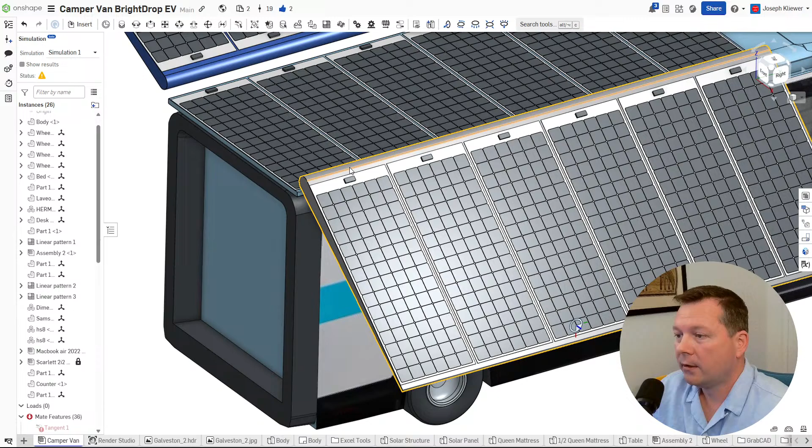So I've basically modeled up these Maxeon air panels, and this is the junction box. It would be nice if the junction box was on the other side so you could tuck it inside here. But then again, if you're driving with it folded up, maybe it doesn't matter.

I don't know if I had this on the right screen. Maybe you couldn't see it. Sorry about that.

So these are the 3 panels. The only difference is they sort the cells for maximum output versus a kind of budget panel with a little bit lower output. So you get 330 watts per panel, and we've got 1, 2, 3, 4, 5, 6 panels. That's 2,000 watts, another 2,000 watts, total you've got 6,000 watts. The shading issue on this, I'm not sure about yet, but the tracking should give you a total energy capture boost of about 40%. So you could really extract a lot of power out of this system.

Would your 2 tilting arrays really need to be on separate MPPTs, or could you combine those and keep them on the same angle? Yes, that's the plan. I was going to put this one on one controller and then these 2 on the second controller. That Victron charge controller can handle the full output of 2 of these arrays on one controller, so yeah, they would track and have matching angles.

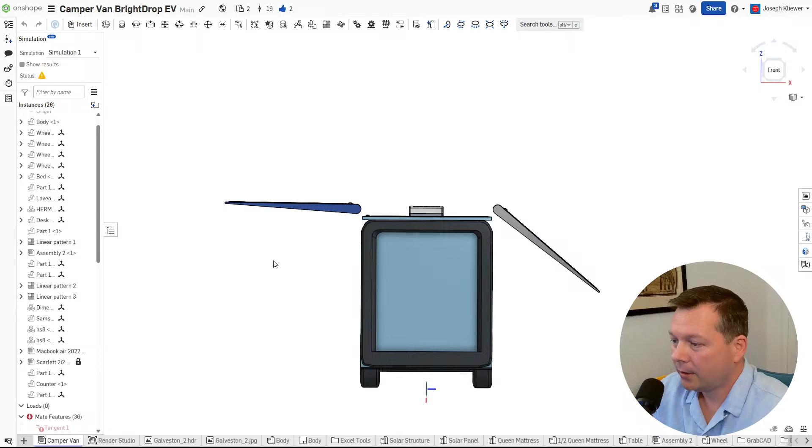So in theory you could put them on the same charge controller and it wouldn't matter. It would only matter while driving down the road if you wanted to have them in this position—it would kind of mess it up. But, you know, maybe I take that back.

Let's say you're driving. Most likely one of them is going to be getting sun, the other's getting nothing. So there's always going to be one outputting more than the other, and the junction boxes on them have a bypass. So let's say this whole panel is dead, and this panel is putting out, say, 2,000 watts because the sun's really low and pointed right at it—it would completely bypass this one, so you'd still get the full output of this one.

You just couldn't independently optimize both. So if you're getting a little energy on both, you'd basically be limited to the 2,000 watts on this one. If you were getting an extra 80 watts here, you wouldn't be able to extract it. But maybe that's good enough.

Oh, so back to the panels—they're real thin, they peel and stick. The only thing I don't know is the thermal coefficient of expansion. As it's getting hot and cold, how much do these expand and contract relative to the aluminum? Is that going to be a stress point? Is it going to stress out the panels and start breaking the junctions between the cells?

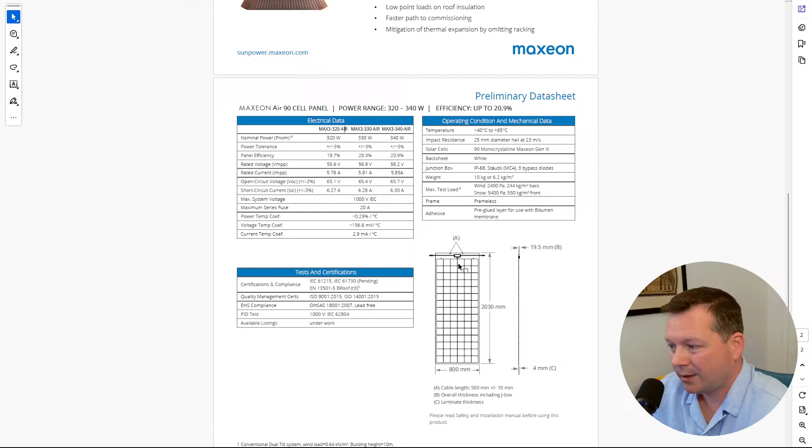I know Maxeon, the way they design the junctions between the cells, it's got some spring to it—I don't have any, but it allows for expansion and contraction. So that might be a non-issue. You know, Aptera's also using these Maxeon cells in their solar car.

There's also the Sol-Ark I used. That one's got, I think, an even bigger, larger solar input. Let me just put some of the stuff in the notes here.

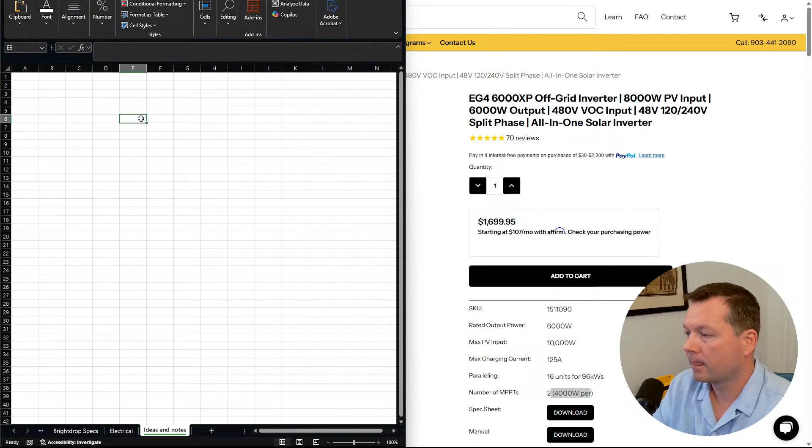8,000 watt input, and it's 48 volt, good. 480 volt input solar, split phase, all in one. And the price looks good.

I don't know the quality of these though. I want to keep it automotive quality. I want it to be something you can put out in service for 15 years, put 150,000 miles on it, and it would still be working.

Oh, where did it go? Here. So I just paste that in there so we have the information.

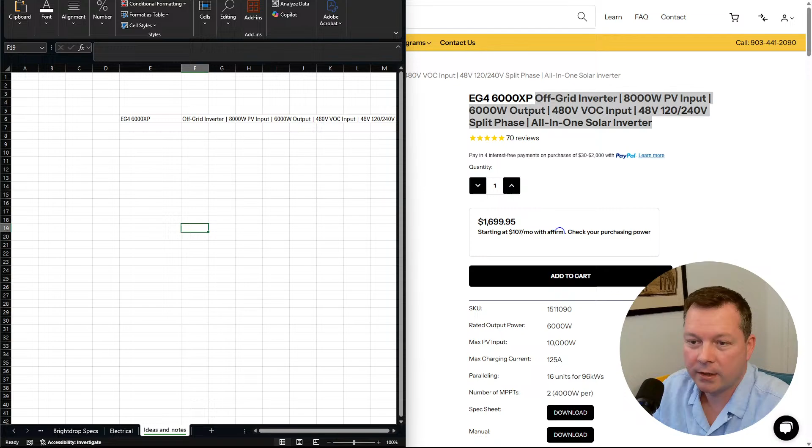Design of the solar wing is very important. I agree. Use additional heavy-duty bracing on the van to create the anchor point. For the actuators, do you have to build some breakaway capability? A gust of wind can topple the van if you're anchoring the wings, or it can rip off the wing entirely. Yep.

So here's a thought on that. I was planning to design for a wind load of 40 mile an hour gusts, and it needs to be design capable to handle 40 mile an hour. So the structural integrity, the actuators, everything needs to be able to take it. But then maybe it has a trigger point at 20, where it automatically folds up, kind of like those automatic awnings on RVs. They hit a wind gust and it folds up.

And then for the strength, oh gosh, I'm losing my voice.

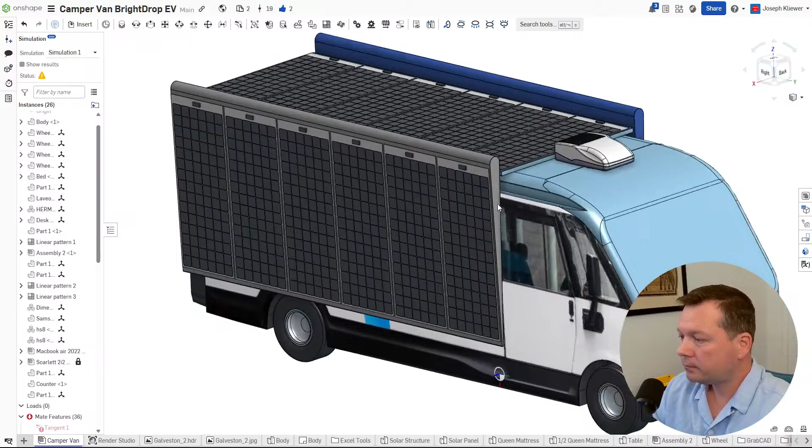So whatever this panel here is, this will have to be some kind of structural thing that mounts to the van. And this rail here, I think I can get access to those rigid aluminum frame rails that go around the inside, so it can tie directly into the frame rails of the vehicle. So this top platform will be really rigid, and then the front and the back will have some kind of large structural bracketry that covers the front and the back and ties into the actuators.

And maybe if those actuators aren't enough, then maybe you do redundant actuators in the front with the same structural member. And that structural member in the front would probably include some kind of fairing that would maybe cover this, or not cover it, it'd be open for the AC. This is just some model I pulled off of GrabCAD or something, but that needs to be figured out too. But anyhow, some kind of fairing for drag coefficient. And then those would tie into the endpoints with this large torque tube of aluminum that would make it structurally sound.

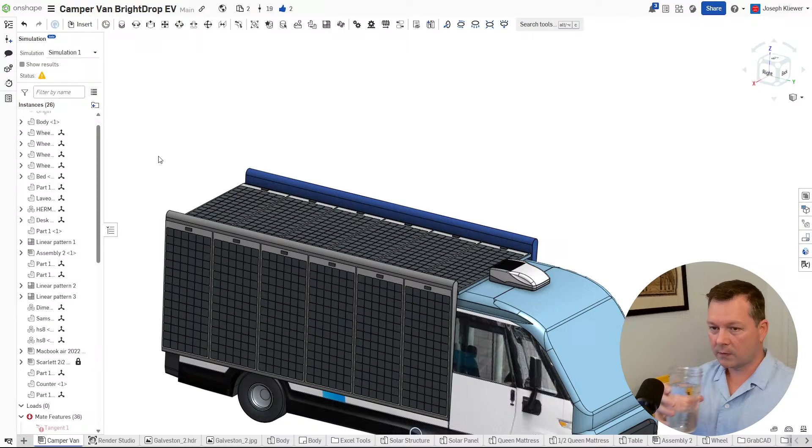Oh, and toppling the van. So another thing I was thinking about doing was whatever actuator mechanism, so it's designed for a 40 mile an hour gust, but maybe it has like a 45, 50 mile an hour slip clutch in there. So let's say it just gets slammed with a big wind gust, it doesn't lock up, it'll just fold over. Yeah, maybe it'll crash into the other side and break something, but that's better than the van flipping.

And we do have the advantage of a huge traction battery in the bottom, so this thing is going to have an awesome low center of gravity. You've got a heavy drive unit in the rear and the front, and then a big old battery. So I'm not sure what the CG height is, but it should be pretty low.